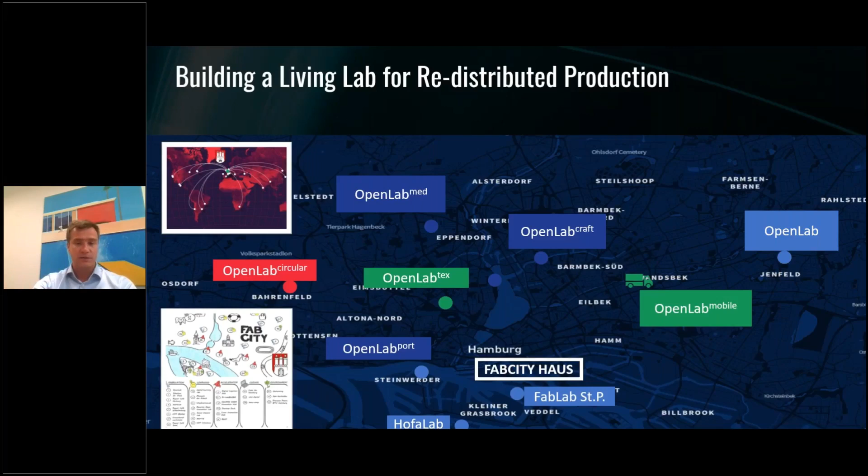This Fab City project is funded by dtec.bw, and it will last until 2024. And within this project, we are establishing and researching a distributed production network within small workshops, as well as pop-up factories, mobile factories in different sectors such as textile, recycling, medtech, spare parts production, and so forth.

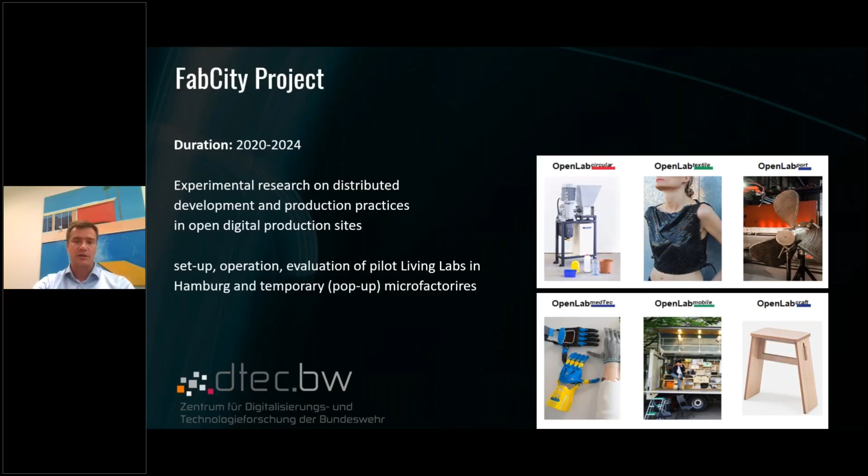What is special about open production sites such as Fab Labs or makerspaces is that you're able to make almost anything, any physical product, in such a space. They are open high-tech workshops with modern digital fabrication technologies, giving low threshold access for anyone to machines that can be operated intuitively. They're accessible and not costly thanks to open source design of the machines, so a basic machine park may cost less than 50,000 euros.

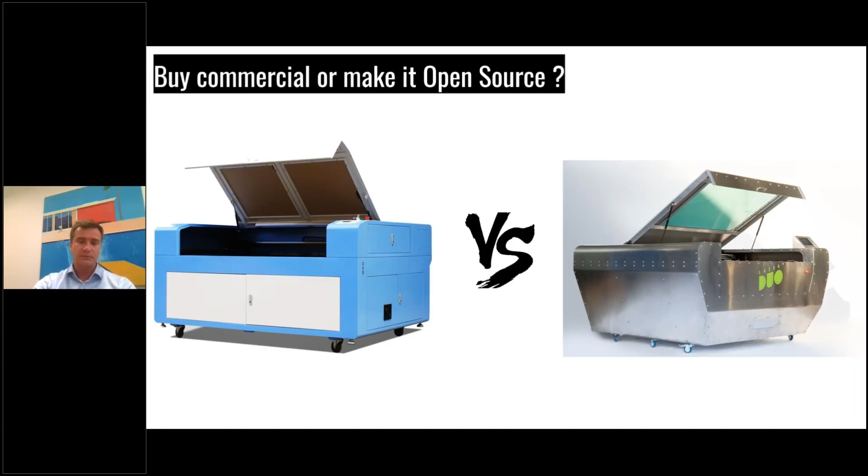While preparing this project and deciding how to set up the open production sites, we had to decide between buying machines commercially or making them open source. We learned early that there's a huge community out there designing, developing, building, and modifying open source machine tools, with individuals, sub-communities, and even companies involved in this movement.

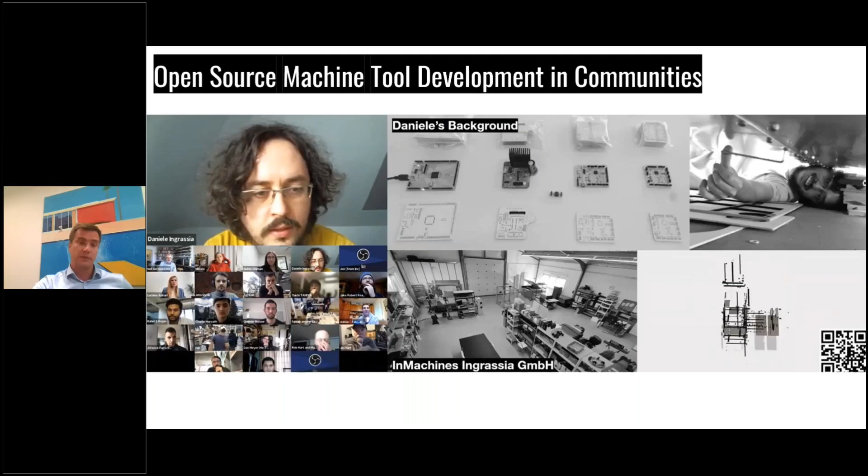We started as an experiment, building machines with this community, and found it worked pretty well. We took the best open source designs we found and cooperated with some of the best developers of open source machines. Then we started building some of their machines together with students and other interested people in Germany, as well as other countries, for example Tunisia.

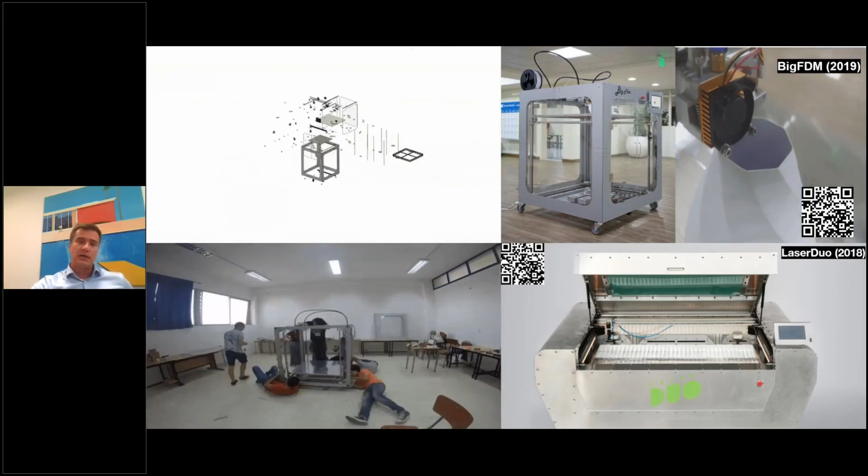We built, for example, this huge 3D printer, which took us just one week. We also built the other machine, the Laser Duo, a laser cutter with two different lasers, which took us just a few weeks to build.

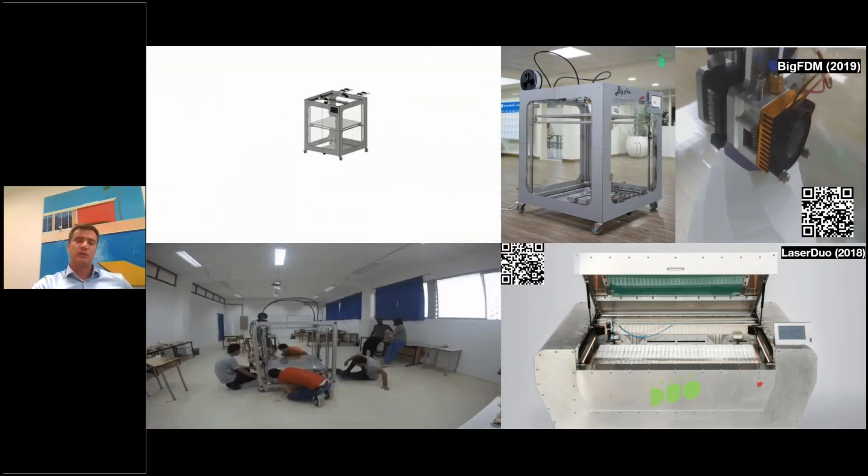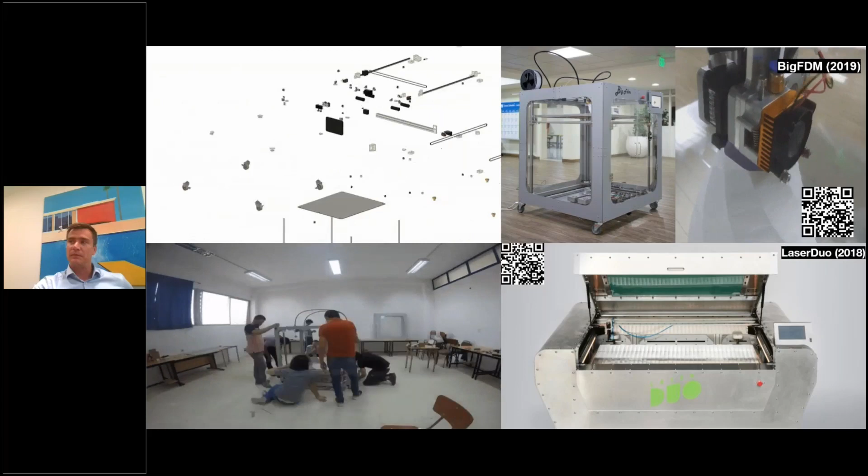The students working with us learned everything from mechanics, electronics, to programming of the machines, and participants of these building workshops were afterwards able to build the machines on their own. Interesting to know is that the bill of material costs for both machines was just below 3,000 euros, and if you had to buy those machines commercially, you'd pay at least 10 times more.

By doing this experiment, we noticed there is a need for such open source machinery, and a potential to spread the machines, enabling people to produce and manufacture wherever and whatever they need at reasonable costs. At the same time, people are able to really understand and learn how these machines work, and how to modify them to make them usable for their needs.

Those are some reasons why we worked on the concept of the Open Lab Starter Kit, now one of the foci of this Fab City project. We're developing this Open Lab Starter Kit, an open source set of machines for Fab Labs and Open Labs, together with a commercial partner. Our first goal is developing a set of open source machines that makes you able to make almost anything, and second is working on the documentation of those machines.

We learned documentation is key for open source machine tools. Documentation means the bill of materials, but also guides that help you build and operate the machines, and we really need to take care of this documentation process properly. We also want to reach the quality of commercial machines with these open source machines, and we see that quality increasing at a tremendous speed. At the same time, we want to transfer all the knowledge behind the machines to the people using them, because we want to empower people to make use of the machines.

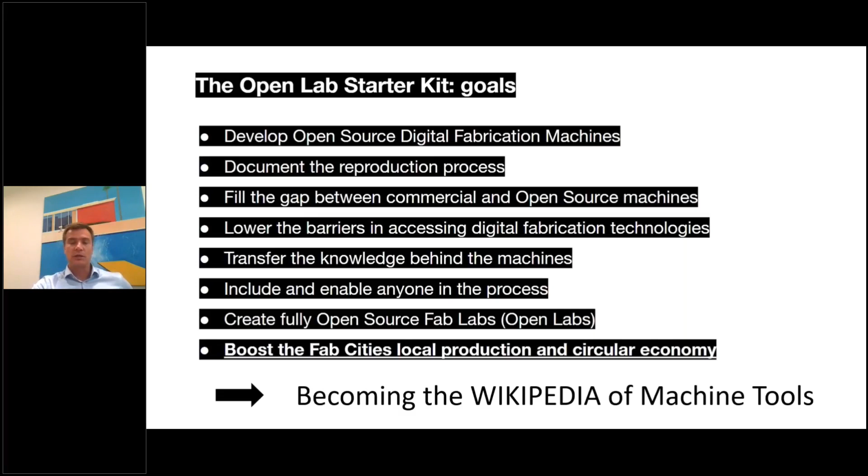This is the base for creating fully open source makerspaces and Fab Labs, and to really boost distributed production and the circular economy, as I mentioned. At the end, our work here is comparable, I would say, to working on becoming the Wikipedia for machine tools.

This Open Lab Starter Kit includes a huge range of machines: large and small versions of 3D printers, laser cutters, CNC milling machines, vinyl cutters, 3D scanners, and maybe some others later on. We will have at least 8 different types of machines with 3 prototype versions, because we will have 3 different development cycles within the project, and at the end we will have at least 24 machines and prototypes.

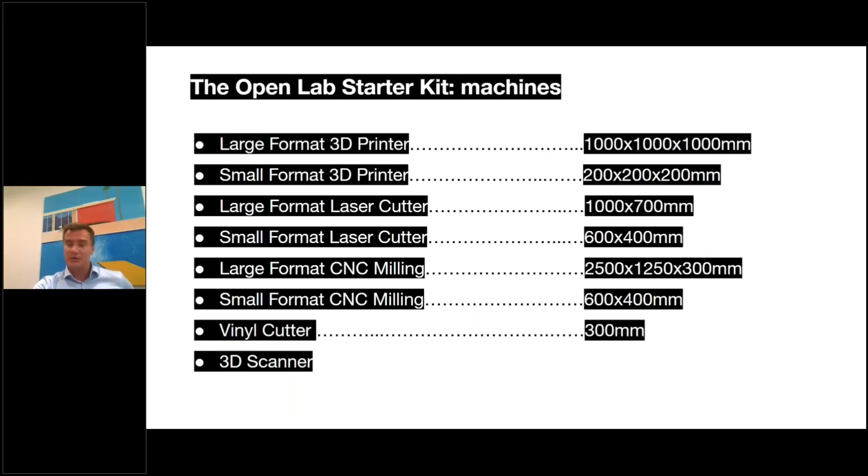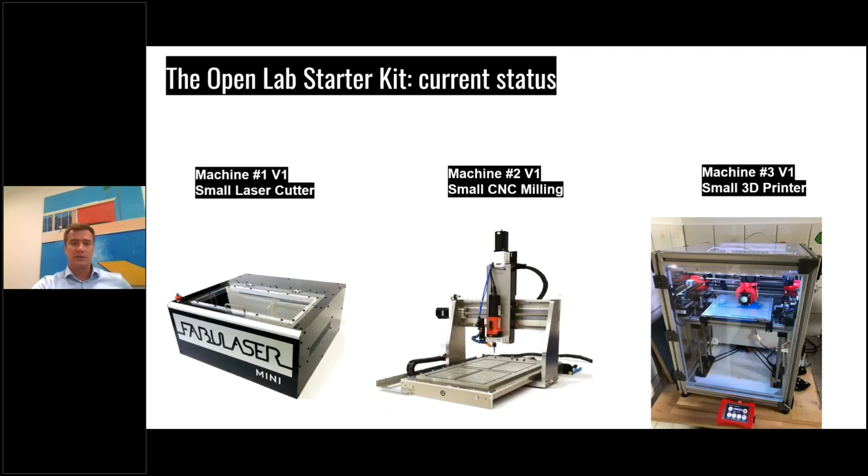We will have at least 15 building workshops where we test the machines as well as the documentation, to understand how easy it really is for people who participate to understand how the machines work. Three of the machines have already been developed: the small laser cutter, small CNC milling machine, and a small 3D printer.

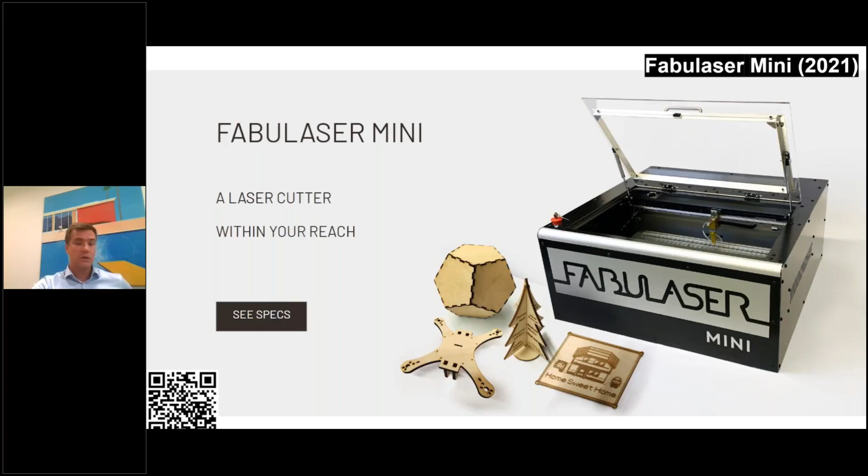These machines do not only look nice, they are also working properly, and they are safe, and designed with and by the community. They are open source and not costly, and everyone will be able to learn to build and use them. Some of the machines have been rebuilt already several times, and this works through workshops, even within the pandemic, remotely.

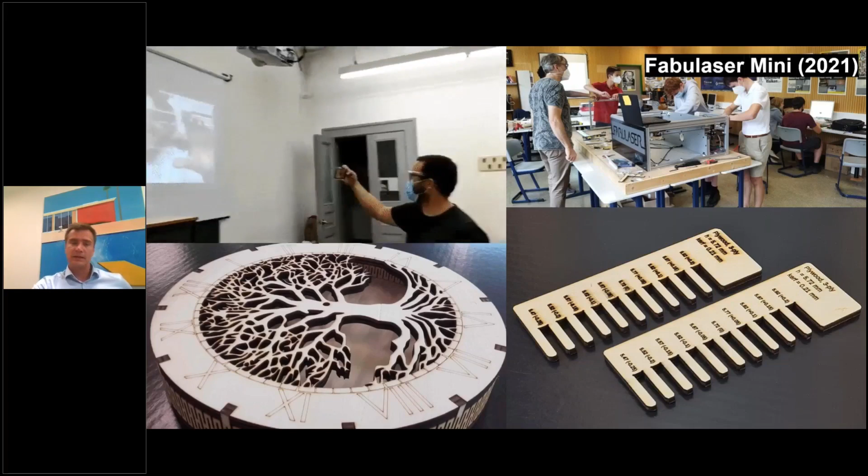The workshops and the concept of workshops, together with the documentation of the machines, is key to us and to this concept of open source machinery, because we need to train the trainers who are able to help build the machines. But it's especially important to work on the documentation, which takes most of the capacity of such an open source machine tool development.

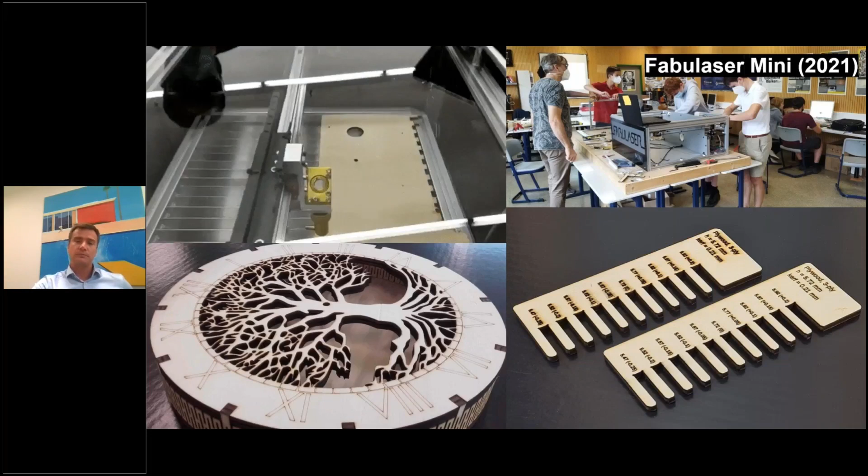Because the machine documentation is open source, you have different options to get one of the machines. You could first buy the whole material using the bill of materials from the documentation, and build the machine completely on your own. This will be the cheapest way to get the machine, but it will take you the most time.

The second option is you can find a distributor that sells you the ready-to-use machine. Of course, this will be the most expensive, because this is how everything works right now with commercial machines. But still, this is an open source machine, and you can better learn how it works because you have the full documentation.

The third way, which is what we do and go for right now, is you buy a prepared kit like this one, pre-assembled and pre-manufactured, and you build the machine on your own using the documentation, and operate it on your own.

You can imagine it's really challenging to create such a documentation or guide, and it will somehow look like a documentation you know from IKEA. When you go to the IKEA store and buy furniture, you get the packages and a really detailed guide on how to build it.

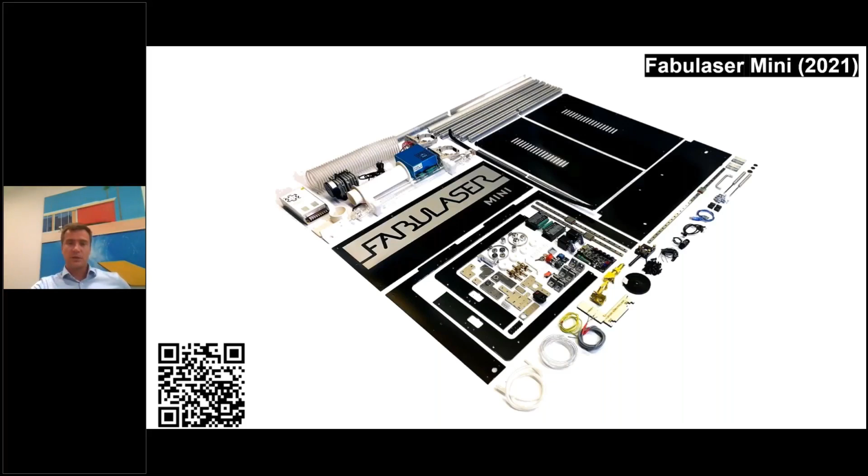The same thing is what we expect and what we are doing with those machines. So when you receive the machine and parts as a prepared kit, just follow the instructions to build it. This is how such a guide looks like - this one is for the laser cutter I already showed you.

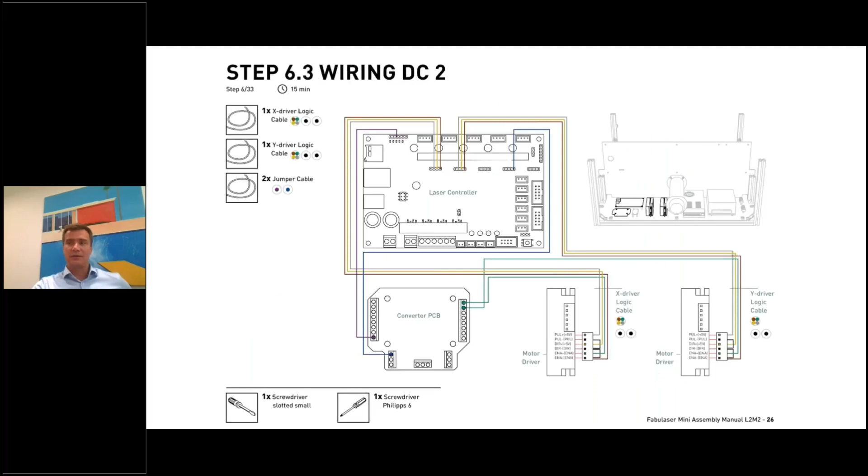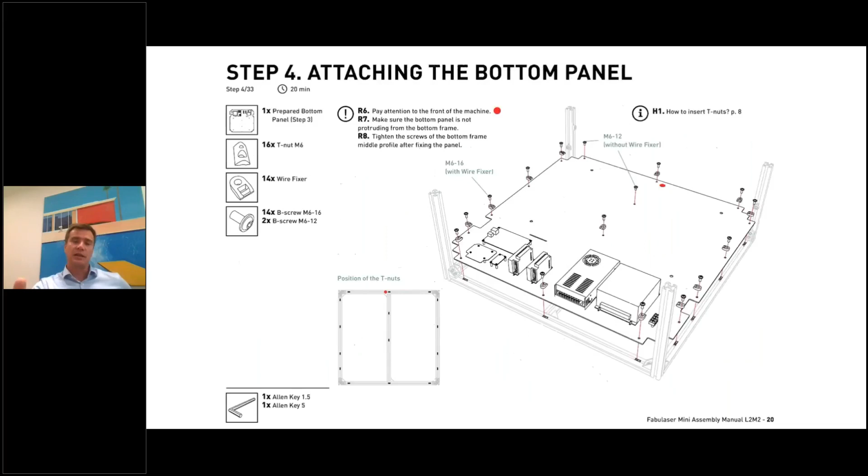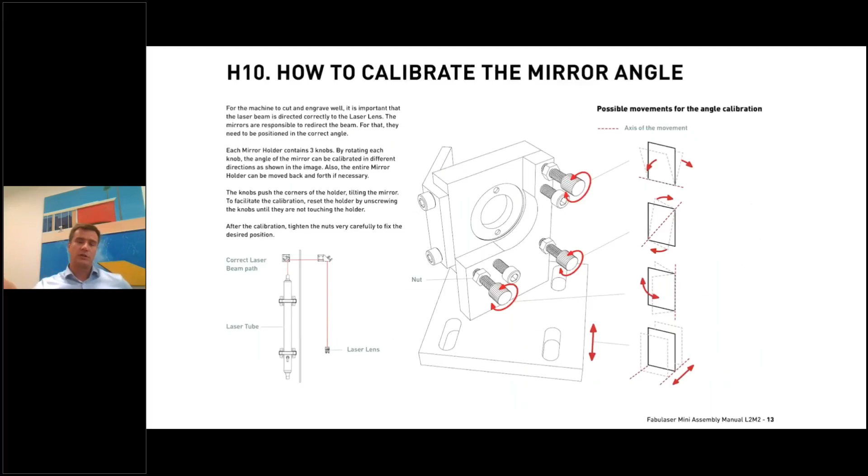Right now, for the development of such documentation, different people are involved, for example usability engineers and designers. They extract the vector images from the CAD files and enrich them with layout, completing the whole workflow from the CAD to the documentation to the operating machine manual.

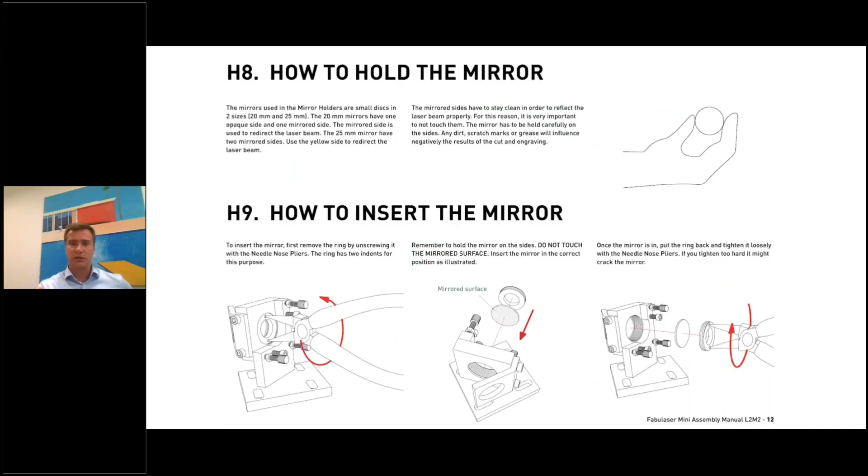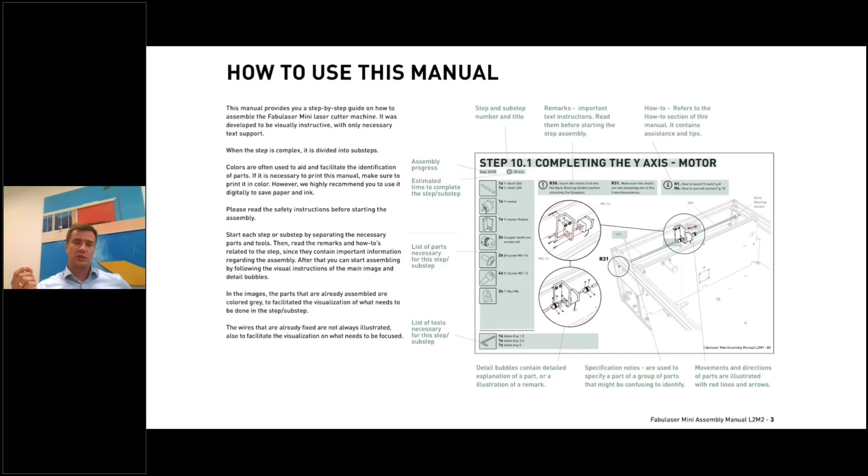But by now, this documentation is mainly handcrafted - it doesn't look like it, but it's handcrafted. One of our goals in the second project, the Interfacer project, is that we want to automate the creation of such an assembly manual.

This would be a big step forward in our mind toward getting what I call the open source machine tool Wikipedia.

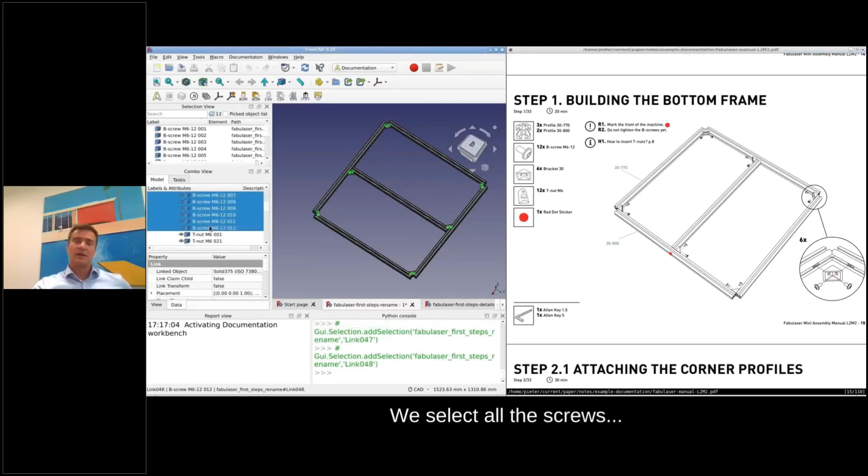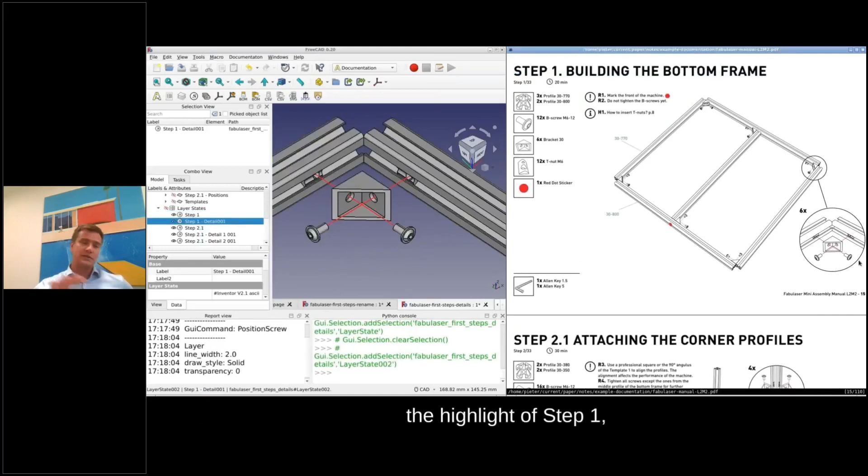Why is that? Because the development of open source machine tools, especially together or within open source communities, is not as straightforward as it may be within a single machine tool company, because you have many iterations, as we already have in the project, and many people working on the project, in parallel, on the same or different problems, the same or different components of the machine.

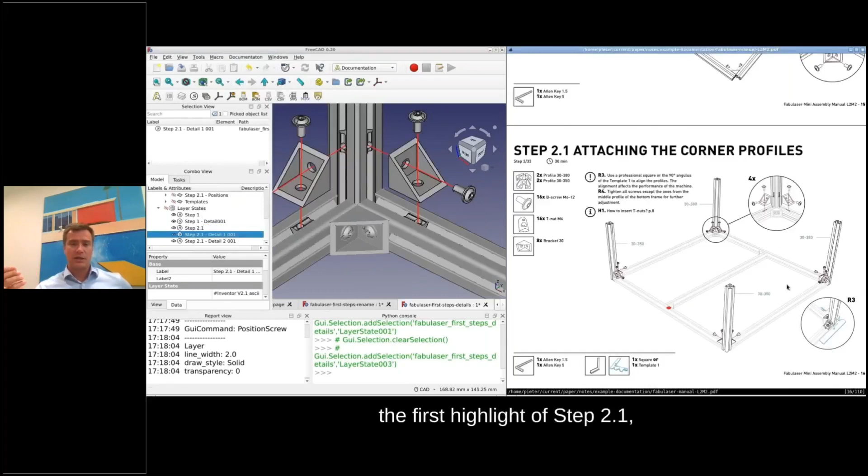But what happens to the nice IKEA-like documentation when we have regular design changes? The answer is that the documentation tool itself needs to adapt to any design changes automatically. This is what we try to achieve within this part of the project.

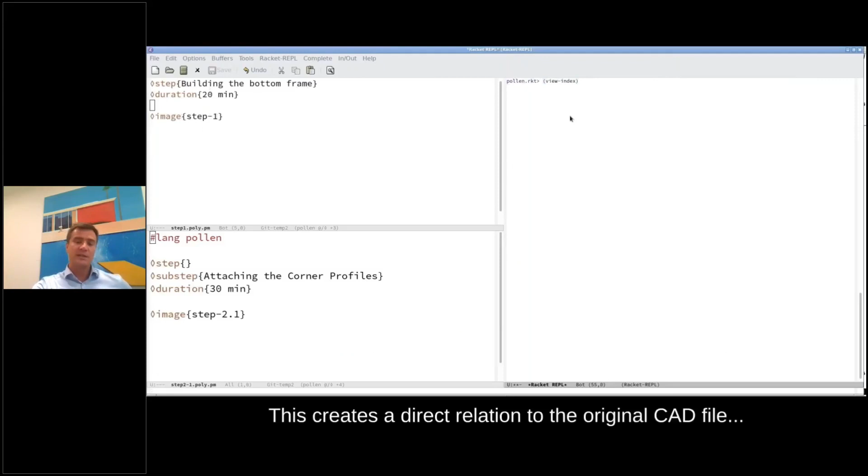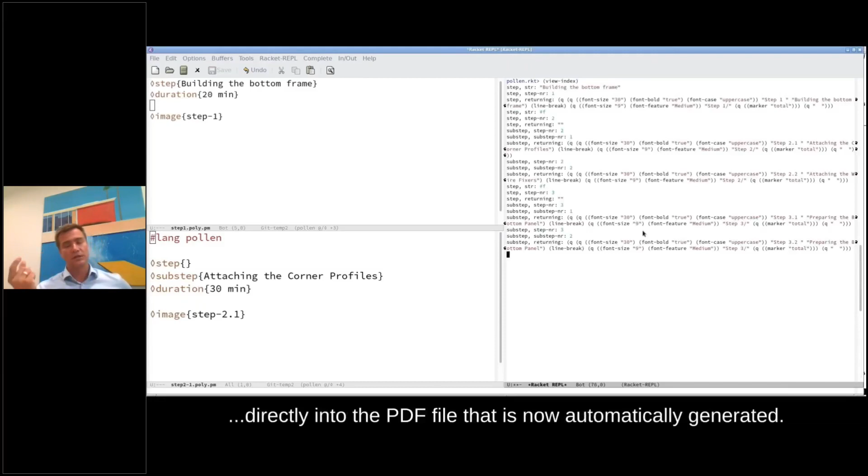Once this is done, you may imagine how efficient documentation may take place in the future, and by getting better documentation, the quality of the machines will also increase.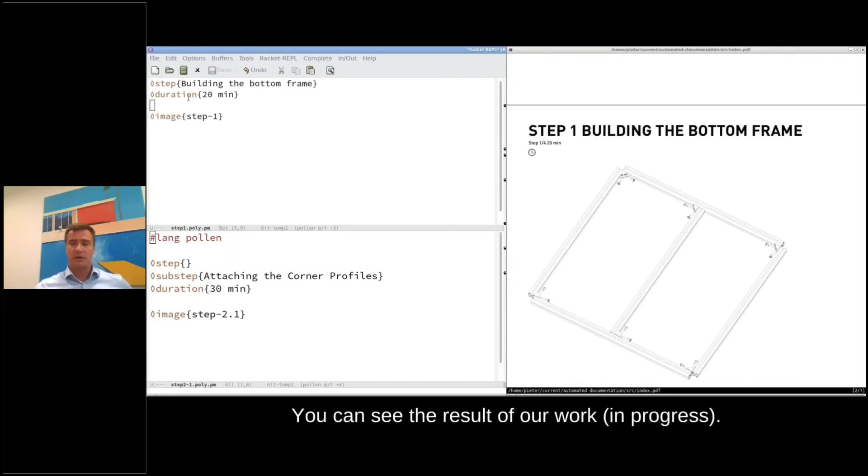As I started my presentation today introducing the physical infrastructure, we are now talking about automated documentation, and this is something about software development. So you see how those projects are connected or complementary with each other.

I want to now talk about the second project, which is the Interfacer project. The documentation I talked about is one smaller part of this Interfacer project. In general, this Interfacer project is all about the digital infrastructure for FabCities, while the FabCity project is about the physical infrastructure. The goal of this Interfacer project is to build an open source digital infrastructure in the form of a federated network that follows the commons-based peer production approach.

It shall enable cities and regions to bundle, organize, and share their data and knowledge that was generated in global knowledge networks and communities of practice, as the open source communities we just saw, in order to produce physical artifacts locally in a decentralized, green, and resilient manner.

Another part of this Interfacer project is the FabCity operating system. It's the core of the Interfacer project, though I already introduced you to another sub-project, the automation. The FabCity operating system helps cities and regions set up and run a decentralized local value creation system by matching local demand for physical artifacts.